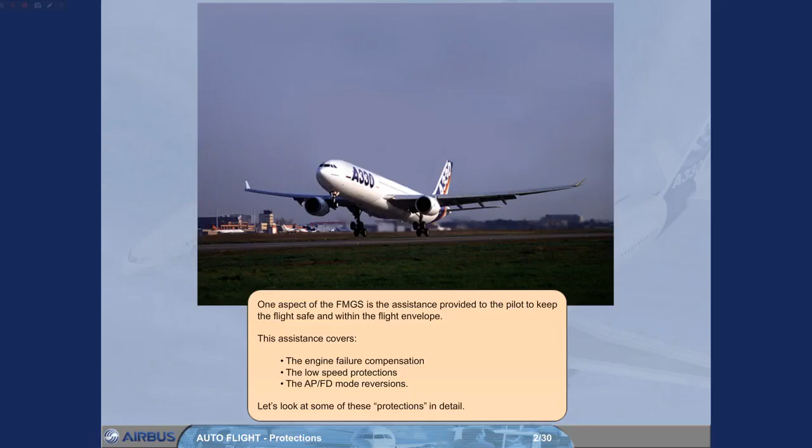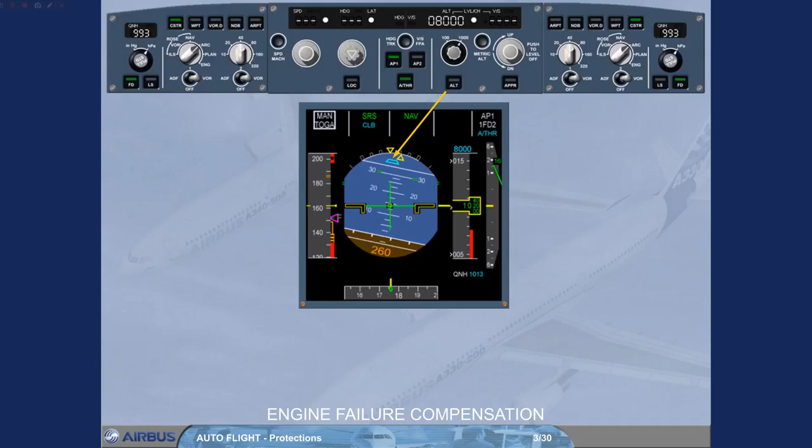In case of an engine failure, with autopilot on, the FMGC ensures an automatic yaw compensation in all modes. This is achieved by the flight guidance part using the yaw damper at takeoff and go around, and the automatic rudder trim in all modes. Furthermore, the autopilot flight director SRS pitch mode automatically adjusts the reference target guidance speed in case of an engine failure at takeoff or go around.

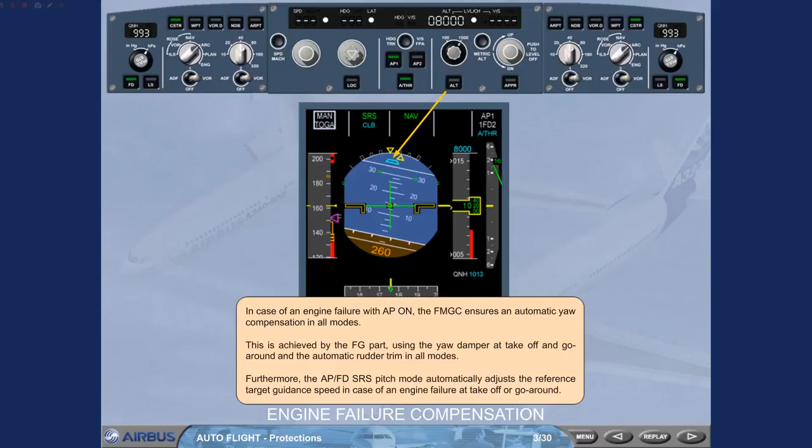Low speed protection is achieved by the following features: the autothrust speed mode, the low energy warning, the alpha floor protection, and the wind shear protection.

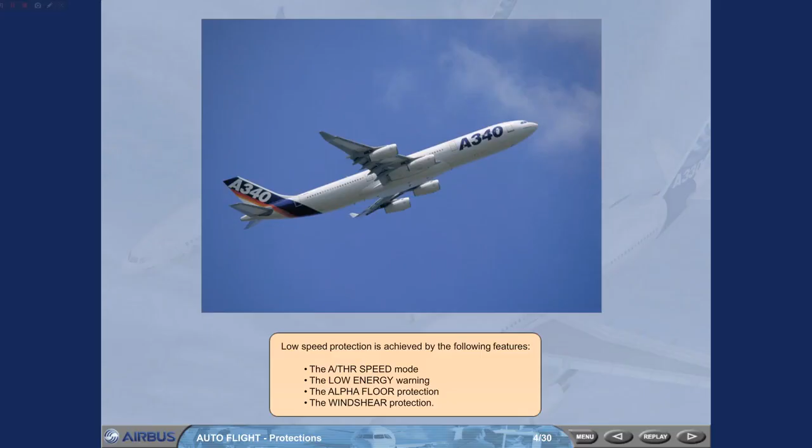When the autothrust is on and in speed mode, if the speed target is selected by the pilot on the FCU and the speed target is below VLS, the autothrust will not allow the speed to decrease below VLS.

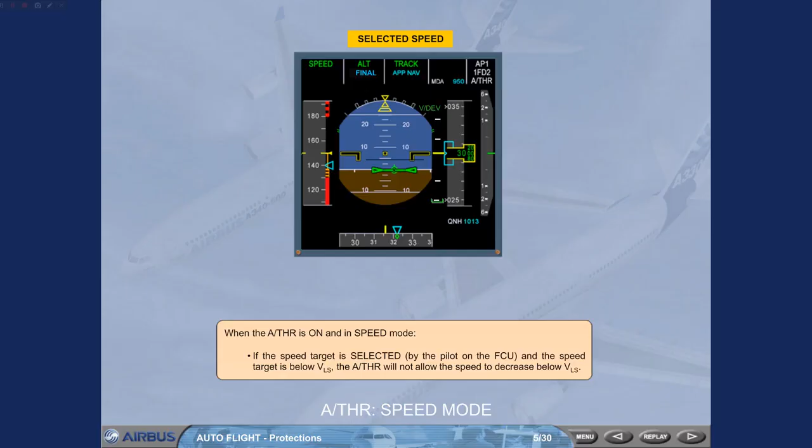If for any reason such as turbulence, shear, autothrust off, the aircraft speed drops significantly below VLS, a repetitive speed oral warning is automatically triggered by the PRIM. It drives pilots' eyes to the speed scale, so as to readjust thrust, for example. This warning takes into account the aircraft deceleration rate and current flight path angle, which explains the low energy wording.

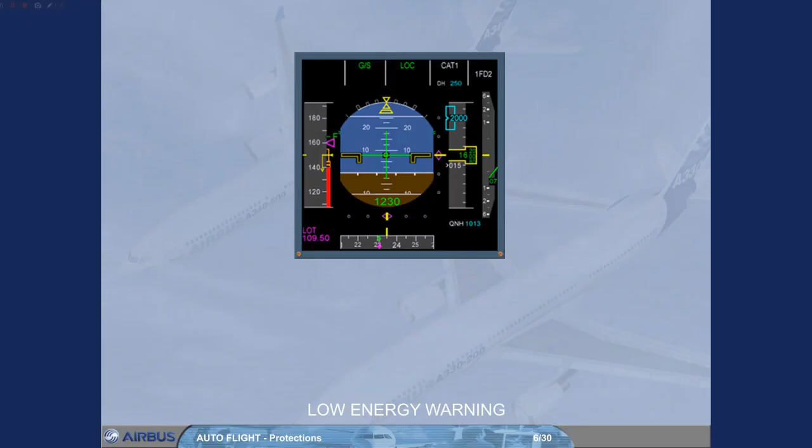It is available when the aircraft is on departure and arrival, between 100 feet and 2000 feet RA, and in configuration 2, 3 or full.

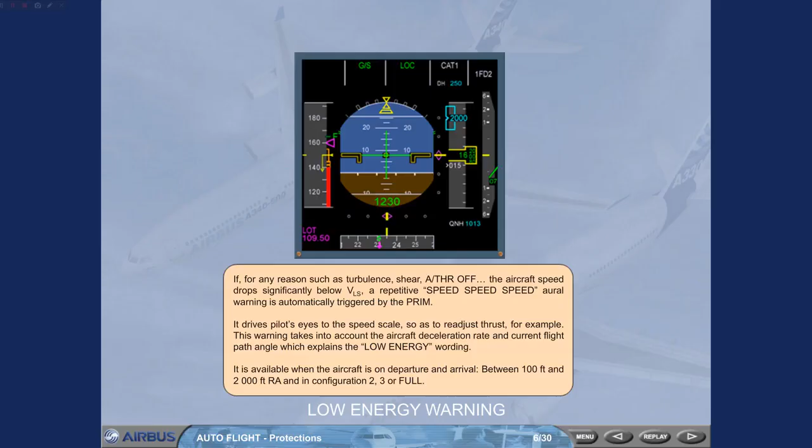If the aircraft speed continues to drop below the low energy warning and the angle of attack increases above a given threshold, the alpha floor function of the autothrust is triggered. The autothrust commands full thrust, i.e. TOGA thrust. The angle of attack threshold, which triggers the alpha floor protection, is processed by the PRIM as a function of aircraft parameters such as configuration, weight.

When alpha floor is triggered, autothrust is turned on, if it was previously off, indicated by a white autothrust on the FMA. Alpha floor in green is displayed as the autothrust mode. The alpha floor function is available from liftoff down to 100 feet radio altimeter. Note, the alpha floor protection is lost in case of engine failure or autothrust failure. See your FCOM.

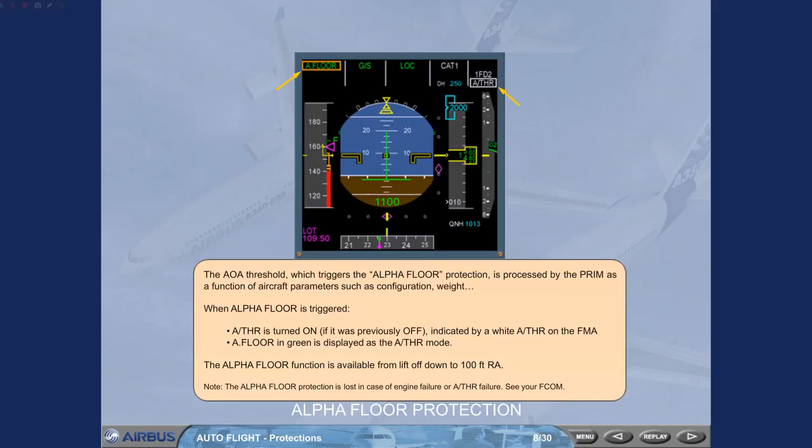When exiting the alpha floor conditions, the autothrust mode reverts to TOGA LK mode, which indicates that TOGA thrust is locked, regardless of thrust lever position. To regain thrust control, you have to switch off the autothrust. You now have manual control of the thrust. You may re-engage the autothrust when convenient.

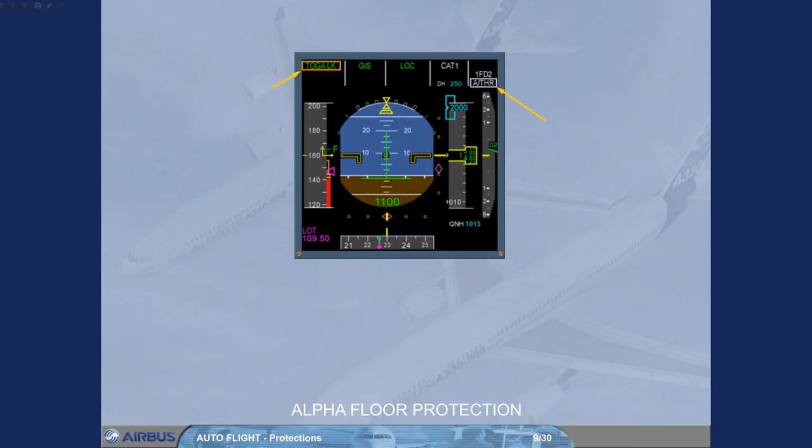Wind shear, wind shear, wind shear. If the aircraft encounters wind shear conditions detected by the FE part, a red wind shear message is triggered on both PFDs, associated with an aural wind shear, wind shear, wind shear warning. This reactive wind shear warning is available from liftoff to 1300 feet, at takeoff, and from 1300 feet down to 50 feet during landing, with at least Conf 1 selected.

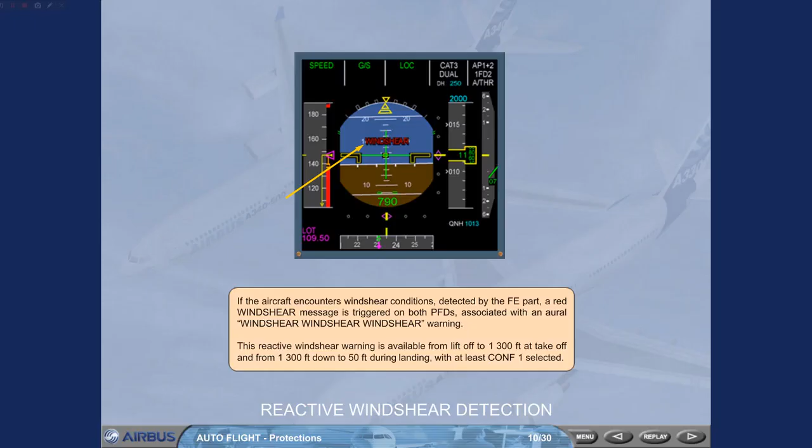The reactive wind shear warning is provided by the FE. The FG provides the following protections against wind shear. At takeoff and go around, with the autopilot flight director speed reference system vertical mode, which commands a pitch, ensuring a minimum positive rate of climb despite a potential speed drop. In approach, with the ground speed mini function, the managed speed target in approach is automatically adjusted with wind variations, so as to ensure that the aircraft ground speed does not drop below a minimum value.

Note, if the angle of attack gets too high and reaches the fly-by-wire angle of attack protection, the autopilot disengages. The fly-by-wire maximum angle of attack protection assists the pilot to best react.

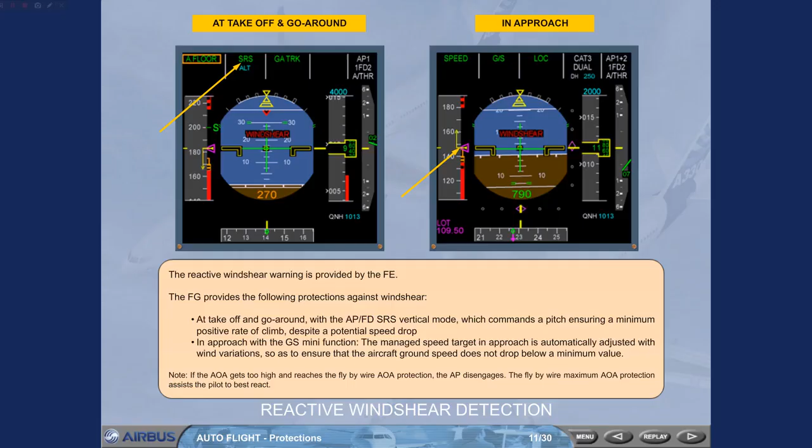Let's now review the mode reversions of Autopilot Flight Director and Auto Thrust. The mode reversions are automatic mode changes which allow a comprehensive autoflight system behavior when the pilot modifies a target on the FCU, happen in case of loss of navigation mode, and ensure a flight envelope limit speed protection.

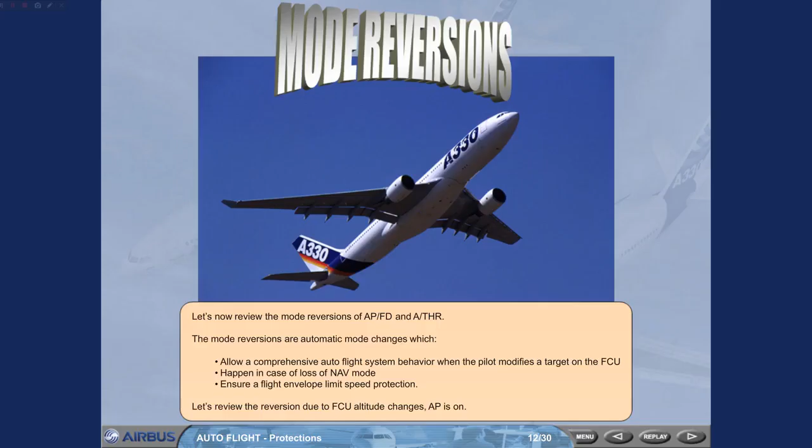Let's review the reversion due to FCU altitude changes. Autopilot is on. Suppose we are in climb, using either open climb or climb to flight level 250 as cleared by ATC. While crossing flight level 225, ATC requires us to level off at flight level 220. We therefore select the FCU target altitude to flight level 220.

The Autopilot Flight Director vertical mode reverts to vertical speed on the current vertical speed value. Notice also that altitude blue is not armed. It is then up to the pilot to decide how to regain flight level 220, by dialing the desired vertical speed target, i.e. down to -1000 feet, or by pulling the altitude selector to engage open descent. Note, you can imagine the same scenario in descent.

Let us see another case. We are now capturing the target altitude, altitude star green. The ATC clears us back up to flight level 250. We therefore select the FCU altitude target to flight level 250. The Autopilot Flight Director vertical mode reverts once again to vertical speed with the current vertical speed value.

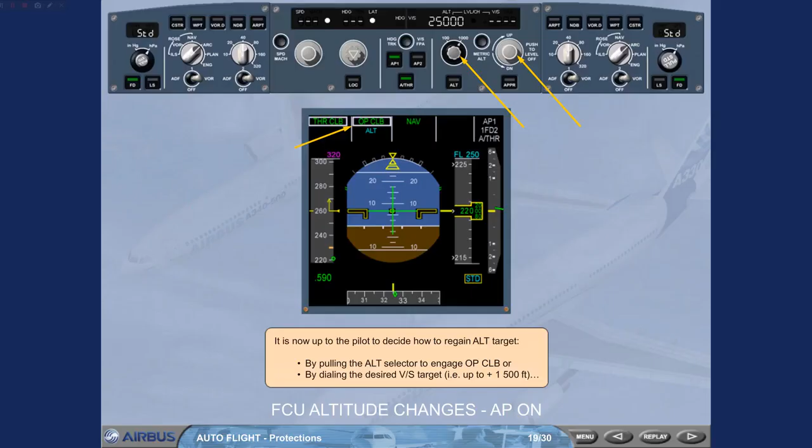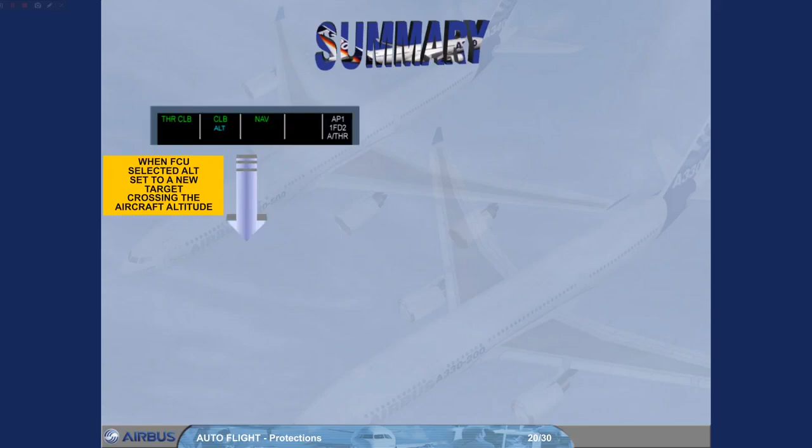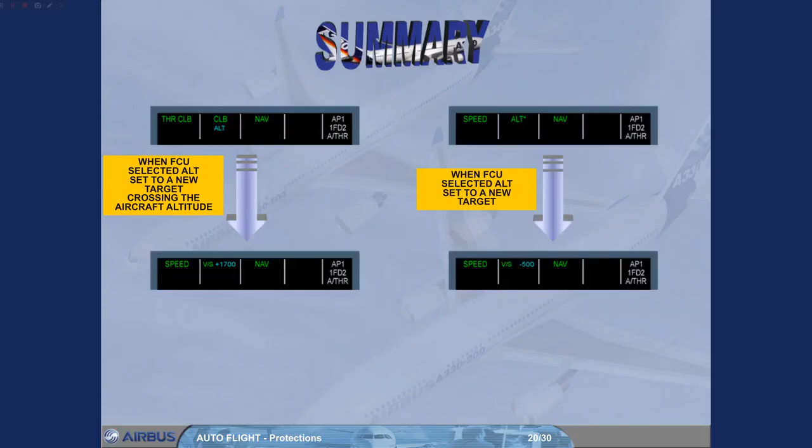It is now up to the pilot to decide how to regain altitude target, by pulling the altitude selector to engage open climb, or by dialing the desired vertical speed target, i.e. up to plus 1500 feet. These are the essential mode reversions linked to FCU target changes which you may have to make in case of ATC late clearances. They ensure no discontinuity in aircraft behavior and leave you full authority to satisfy these clearances.

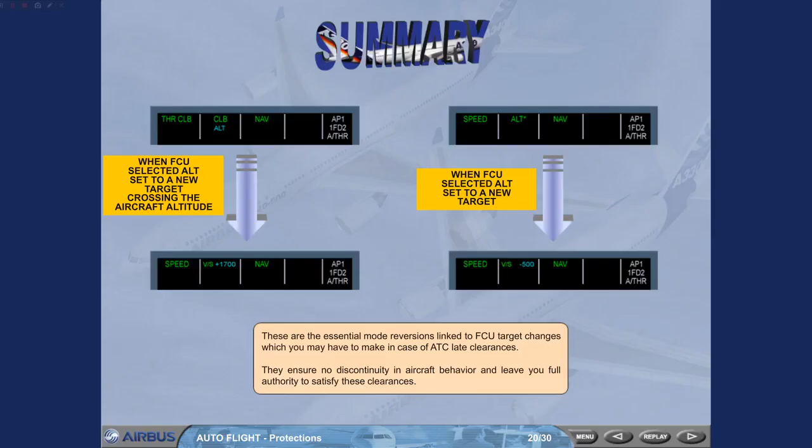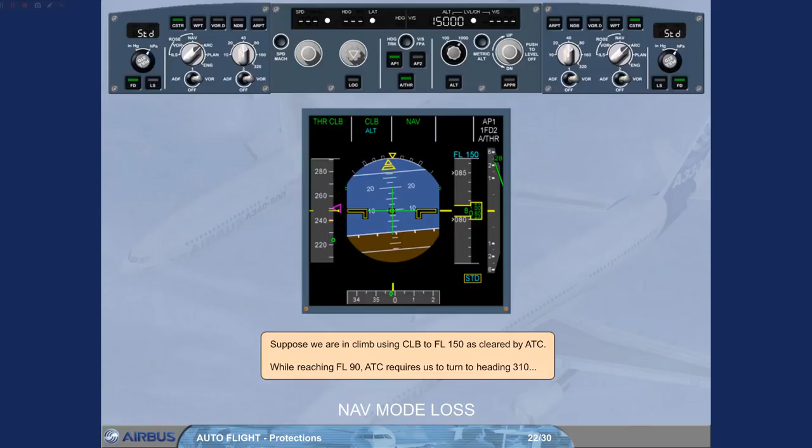Let's review the reversion mode due to the loss of navigation mode. Suppose we are in climb, using climb to flight level 150 as cleared by ATC. While reaching flight level 90, ATC requires us to turn to heading 310. We therefore select the FCU target heading to 310. The Autopilot Flight Director vertical mode reverts from climb to open climb, as the lateral mode navigation is replaced by heading. The aircraft pitch behavior is unchanged.

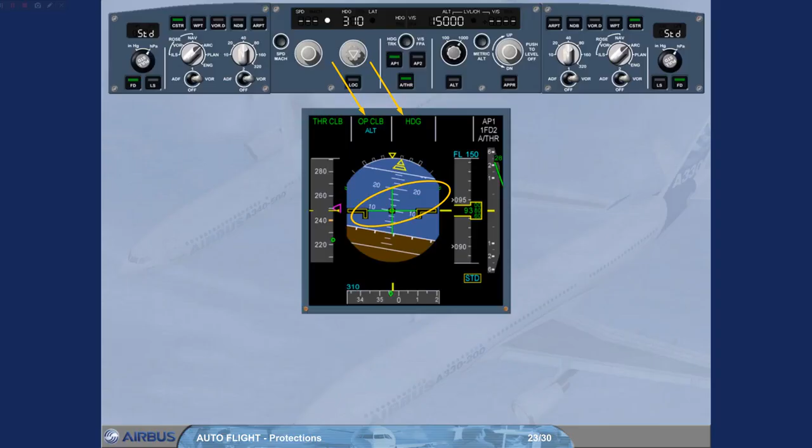Note, if an altitude constraint was targeted with climb mode, it reverts to the FCU selected altitude when open climb mode engages.

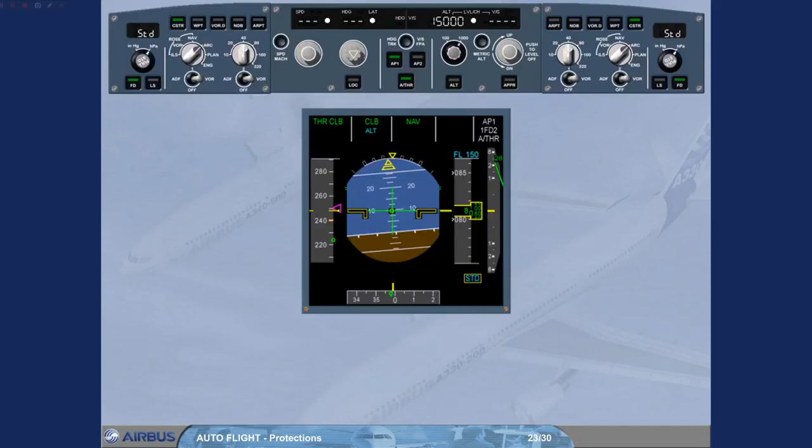We have seen the loss of navigation mode in climb. On the right side of the screen, you can review a similar scenario in descent. When heading mode is engaged, which causes the loss of navigation mode, descent mode reverts to vertical speed mode, with the current vertical speed value, and speed mode engages on autothrust. The aircraft pitch behavior is unchanged. Note, the loss of navigation mode may be caused by a flight plan discontinuity.

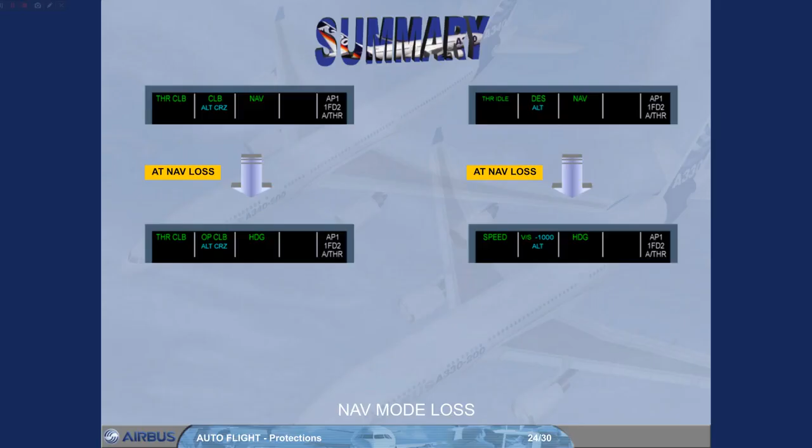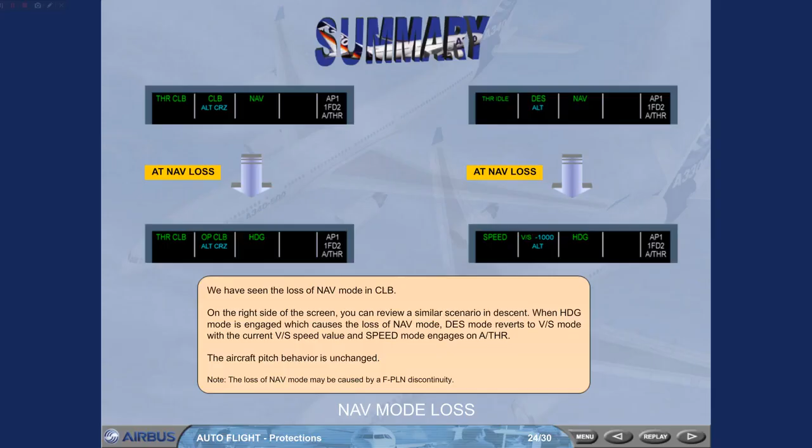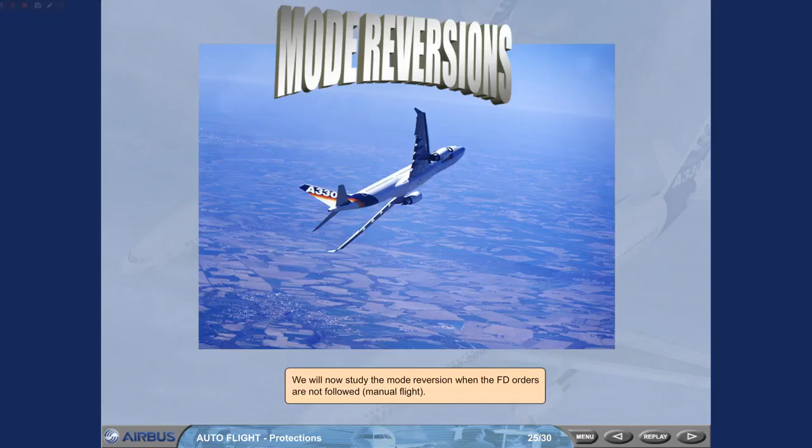We will now study the mode reversion when the flight director orders are not followed. Manual flight. Suppose the aircraft is manually flown with flight director on, autopilot off. The current vertical mode is open descent and the autothrust mode is thrust idle. In order to demonstrate the next reversion, the aircraft is pitched up, disregarding the flight director orders given by the flight director bars. The speed decreases.

Let us see another case. This time we are in climb with thrust climb, open climb modes engaged. For any reason, we do not hand fly the flight director pitch bar, and we pitch the aircraft down. The speed increases. When the aircraft reaches Vmax +4, both flight directors disengage and the auto thrust, if active, reverts to speed mode. Thus, the flight director bars are removed, and the thrust reduces to recover the speed target. Note: depending on the aircraft configuration, Vmax can be VMO, VLE or VFE.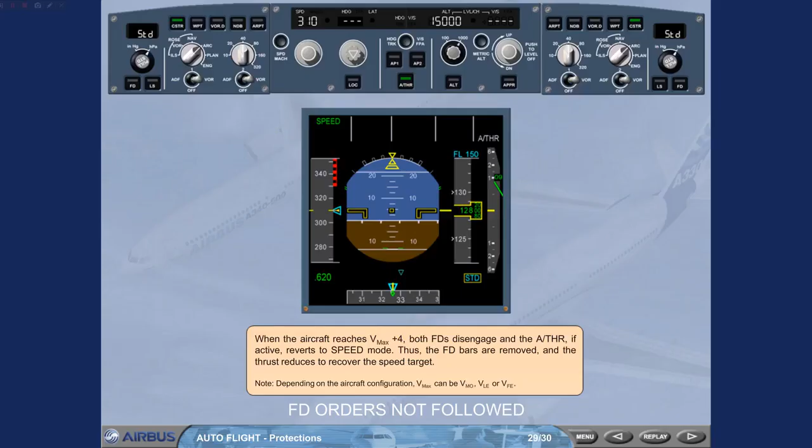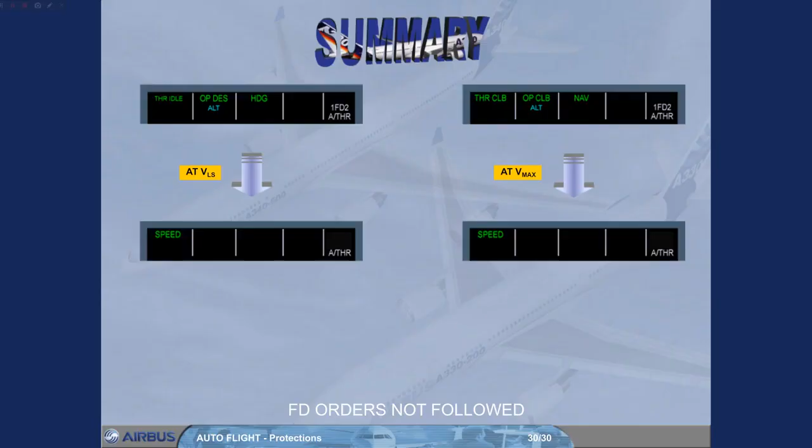The flight envelope limit speed protection is ensured by autopilot or auto thrust, with flight director on, autopilot off, mode reversion so that, at VLS-2, down to VLS-9, depending on speed brake's position, or Vmax +4, the flight director bars are removed, therefore the auto thrust reverts to speed mode in order to regain speed target.